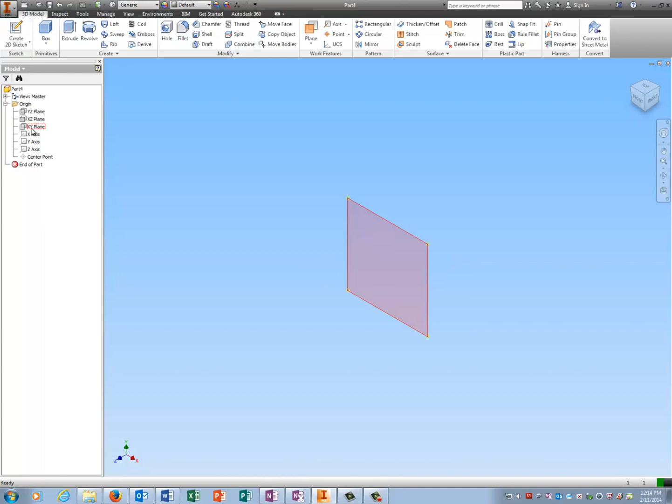Okay folks, this is the axle peg, which is the last part you have to draw. It's also the most complicated part because you cannot do it with a revolve. You have to do it with a loft and you got to put threads on it. So, I am going to draw on the front view, I guess is fine.

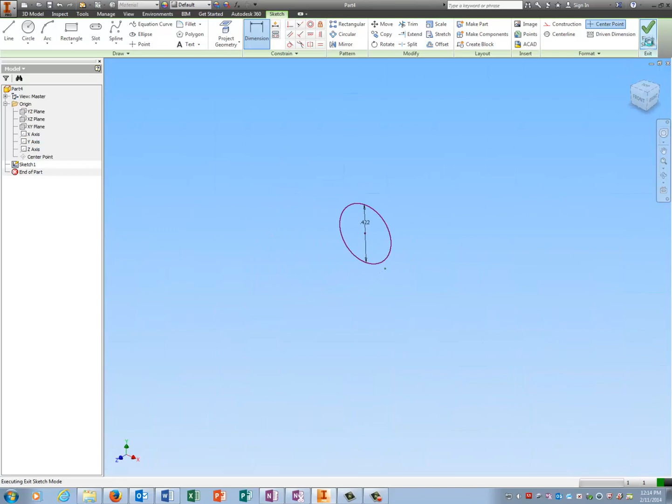The first thing I'm going to do is I'm going to draw that little disc that makes up part of the head of this thing, and the diameter there is 0.422. I'm going to finish the sketch and I'm going to extrude that 0.031, which is what it tells me that the thickness of that little disc is. So now I have the disc,

and now I'm going to do plane offset from plane, and I'm going to do a loft to create the smaller circle and then loft it down. The reason you guys can't do a revolve with this is because it gives you one of those weird spherical radii, and remember that's a 3D measurement in a 2D space and it doesn't work right. You won't get it perfect, and you need this as close to perfect as you can get so your wheels fit correctly.

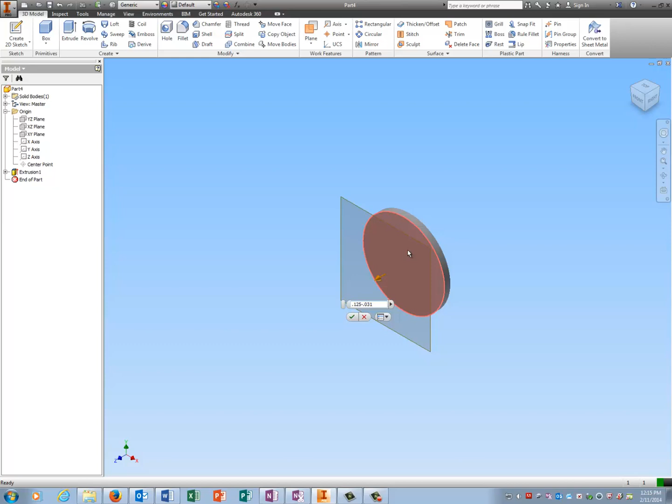So in order to figure out how far I want that plane to be offset from, the height of the entire head is 0.125, but I have to subtract out that 0.031 that I have already created. I'm going to tell it okay. I'm going to put a sketch on this plane,

and I'm going to draw a circle. I'm going to project geometry to make sure they're concentric. So click concentric, click that one, click this one. They are. Dimension. The dimension of the smaller circle is 0.25.

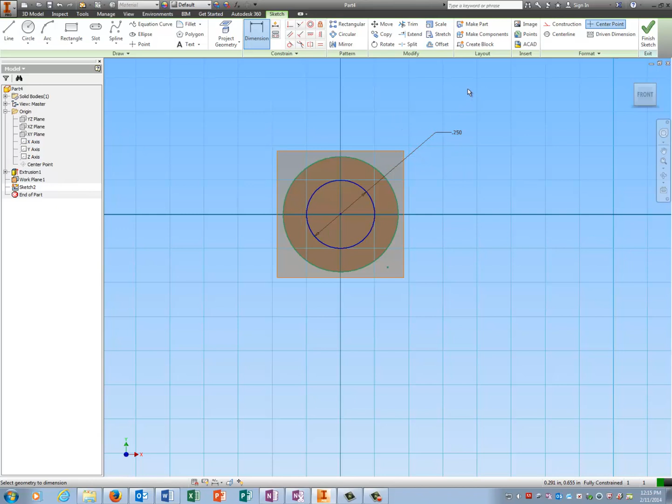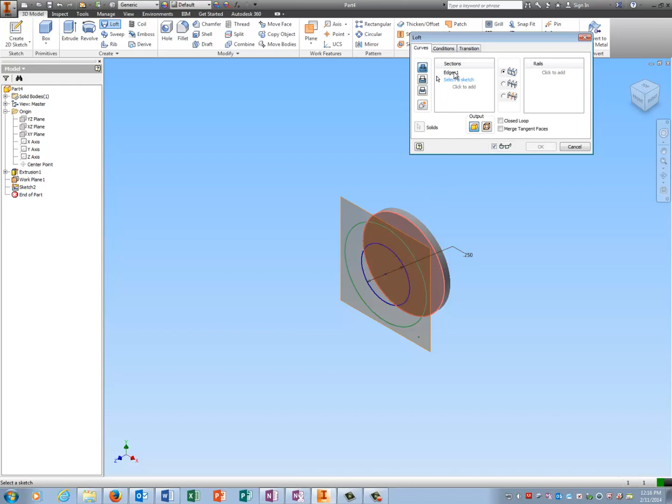So now I'm going to finish the sketch, and I'm going to go to loft. Notice I only have one sketch right now, but I can still loft because I have an edge I can loft to. So I'm going to pick this, I'm going to pick the circle, click to add. Notice it picked up edges instead of sketch. Click this, click the smaller circle, tell it OK. And you should wind up with something looking like this.

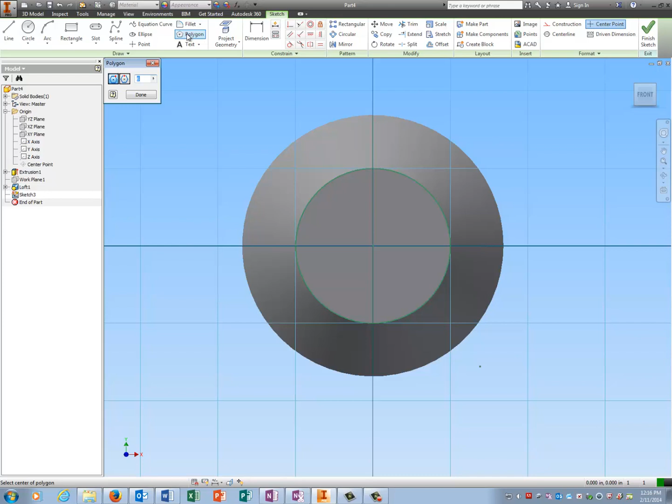I'm going to turn off the work plane, and I'm going to go ahead and do the polygon on the front. To do the polygon, I'm going to use Create 2D Sketch. I'm going to go to Polygon. Sure, I could draw a hexagon and I could calculate all the angles, which are 120 degrees, and it'd take me a bunch of time, or I can just let the computer do it. So I find the center point and I pull out my hex. Over here you can change how many sides you want it to have.

These two options are important to know: inscribed and circumscribed. For what we're doing, it actually doesn't matter because the measurement is across the flats as opposed to either inscribed or circumscribed about a circle. That's what that means. Sometimes when you're working with polygons, you'll have to measure it relevant to the circle that it's either inscribed in, which means it's inside of it, or circumscribed, which means it's on the outside of the circle. So I'm going to tell it done.

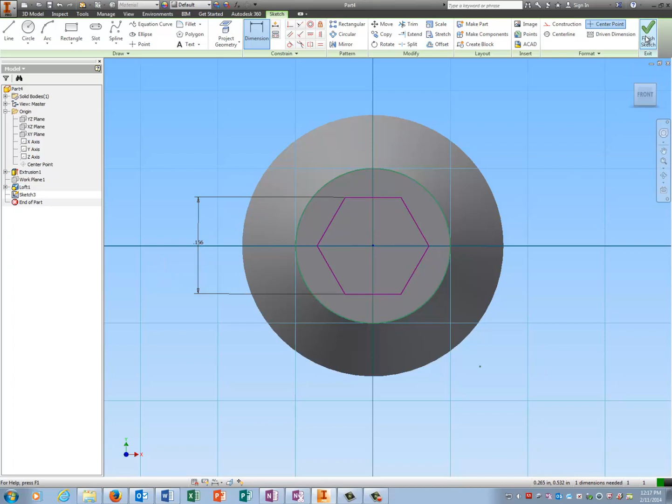I'm going to come up here to dimension, and since it gives us the dimension across flats, like I said, I don't have to worry about that. So this is 5/32, and there's my hex. I'm going to finish the sketch, and I'm going to extrude. Extrude with a cut, and it's going back 0.111. Tell it OK.

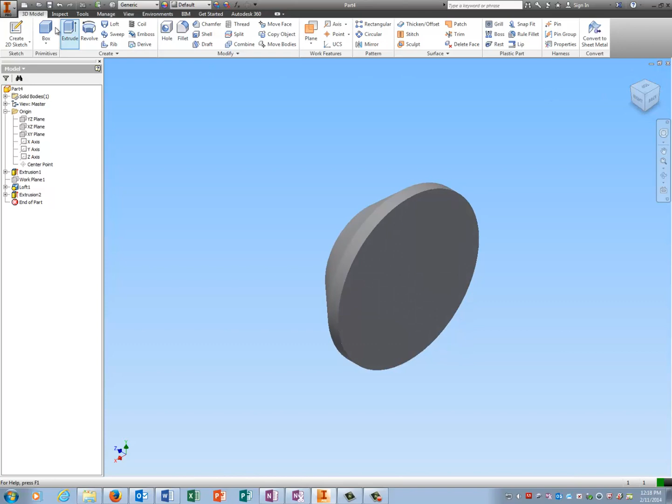The last part here is the tail that's going to wind up with threads on it. So flip it around to the back, throw a sketch on the back of it, draw a circle, make sure it's concentric with this circle. There we go. Dimension this guy.

And the way that I know the diameter that this should be is if I look at the thread callout, and I know it's threads because not only does it look like threads because it's a screw, but because it has letters. And remember, if it has letters, it's got threads on it somewhere. I see 1/4 inch-20 UNC. That means the major diameter is 0.25, which is 1/4 of an inch.

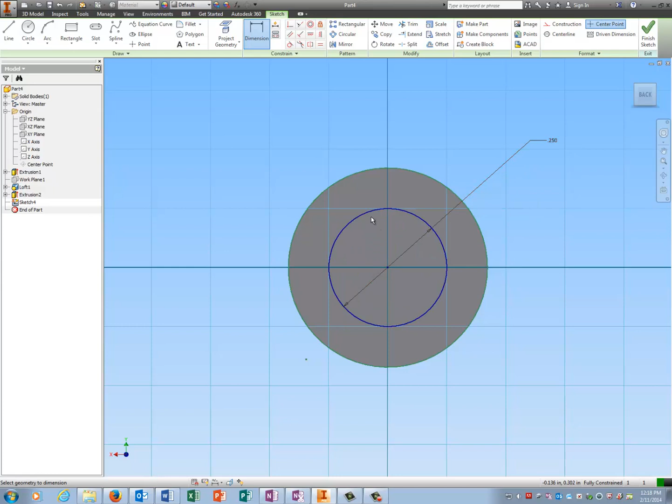I'm going to finish the sketch, and I'm going to extrude. The distance that I'm going to extrude is 1 because it tells me 1/4 of an inch with 20 pitch UNC series times 1 inch. That's where that comes from. I'm going to tell it OK.

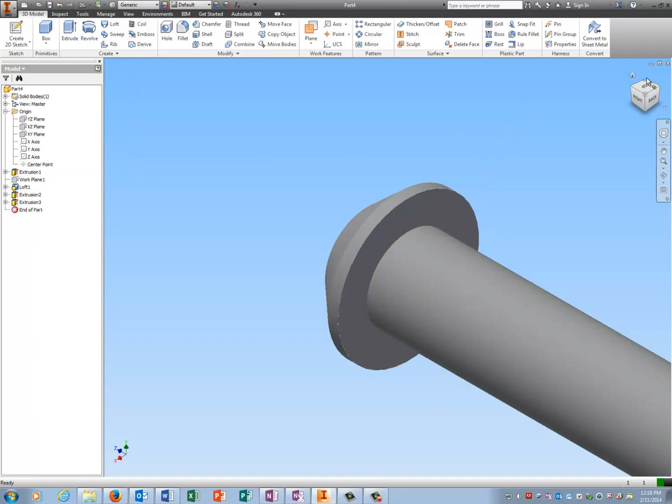And now I have to put the threads on here. So I'm going to go to thread. And I'm going to turn off full length because it tells me it's a 1/4 inch offset. I want the threads to be 1 inch long because that's how long this part is. But the offset's going to be 0.25.

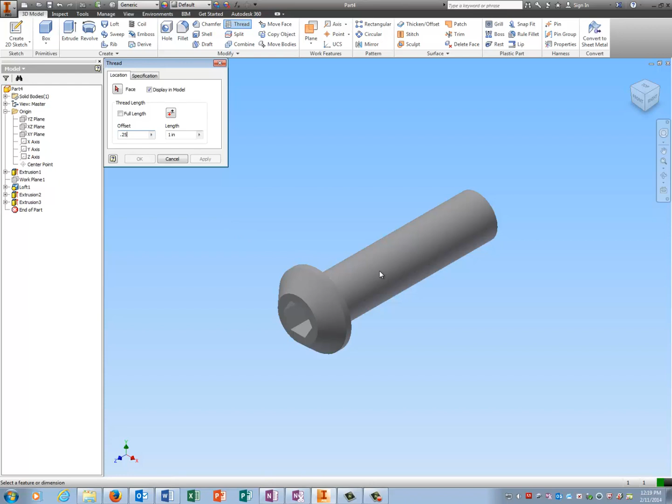Make sure the offset is at this side. Click face. Make sure the offset's closest to the head. And then click there. Tell it apply. And it'll cut the threads for you. The absolute very last step is to put the little chamfer on the bottom. So go chamfer, change the distance to 0.03, click the bottom circle, and tell it OK. And there is your axle peg.

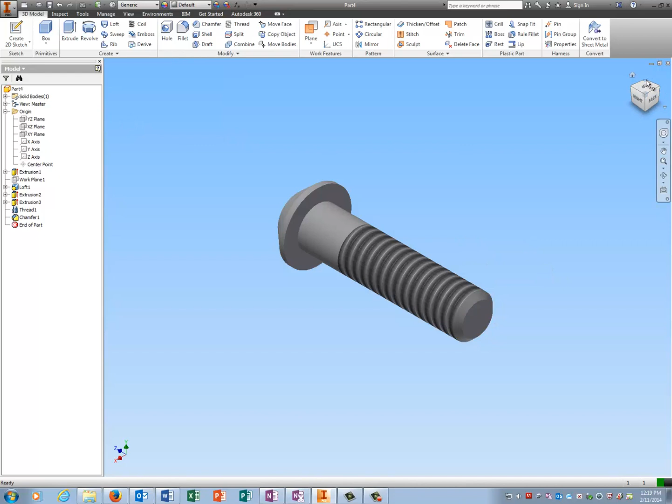And now it's time to assemble, so I'll do that in a separate video. Make sure everything has colors on it and pictures and everything is good to go before you go to an assembly file, guys.